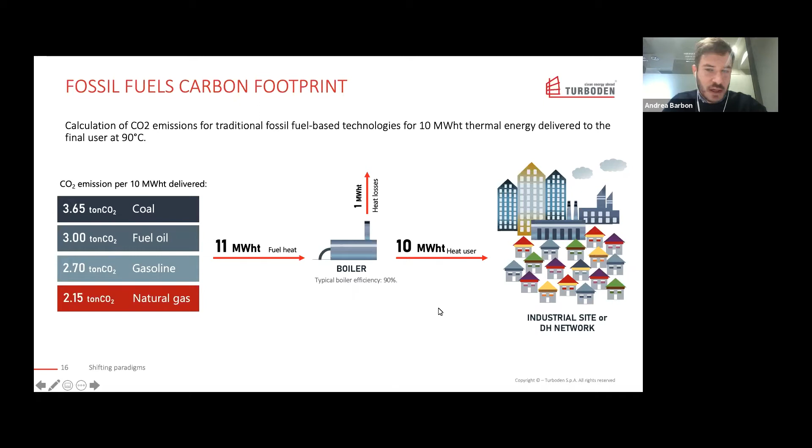Going with the heat pumps, it depends a lot on the COP, so the coefficient of performance that it is possible to achieve. The COP is defined as the ratio of the thermal power output of the heat pump, so that 10 megawatt-hour thermal, with the electricity consumption. Here I put 1 to 2 megawatt-hour, saying that this specific example is based on industrial heat recovery. The COP formula can also be presented in a different way: in order to have good COPs, it is important to limit the delta T between the heat user and the heat source. The heat source could be from industry or from the environment.

And here I presented a couple of alternatives. In case the heat source is from industry, the typical temperature of that heat source is between 50 and 70 degrees. For sure, it depends a lot on the specific case, but these are the typical temperature levels. And the typical heat carrier is wastewater or some exhaust gas within the industry. In case of an environment heat source, it could be groundwater, seawater, or river water in the range of 10 to 50 degrees C, depending on the heat source specifically.

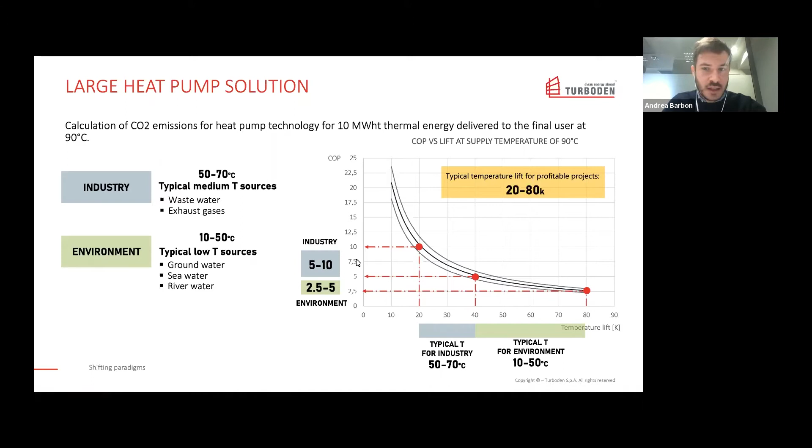And here on the right side, I show the potential and typical COP achievable in case of an industrial heat source or a heat source from the environment. So for the industrial heat source with a temperature of 50 to 70 degrees, the typical COP achievable is in the range between 5 and 10, while in case the heat source is from the environment, the typical COP is much lower, 2.5 to 5, meaning that to produce the same amount of energy output, it is needed to consume more electricity. So in principle, where the heat source is at a higher temperature level, it is much more convenient to have a heat pump in place.

So here the comparison is in terms of CO2. So I'm just saying that electricity, with a COP in the range of 5 to 10, the consumption is 1 to 2 megawatt-hours electric. That electricity could be bought from the grid or from renewables. In case it is bought from the grid, the CO2 emission to produce that electricity is strongly related to the specific country's energy mix.

I will say that we took some data from the EEA about that, showing the specific CO2 emission per megawatt-hour country by country in the European countries. And here I took the average value of 295 kilograms of CO2 per megawatt-hour. This is the European average value, but as you can see here in the right-side chart, it is strongly variable depending on the specific country. Where it is very low, it means that there are a lot of renewables in place, lowering that emission.

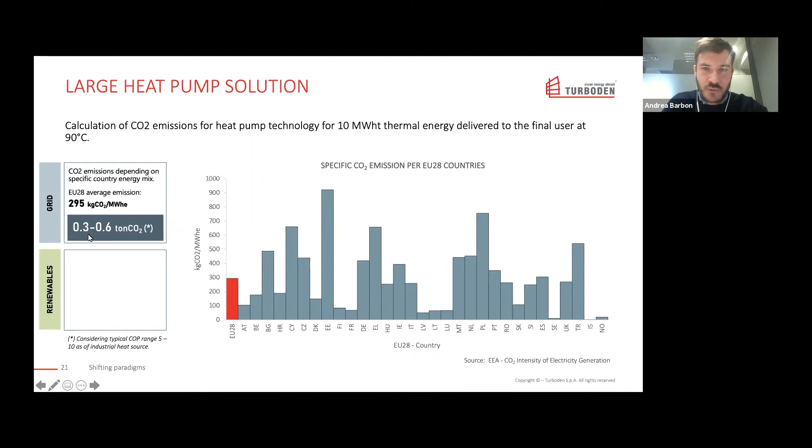So taking the average value, the carbon footprint for that 10 megawatt-hour thermal power will be in the range of 0.3 to 0.6 tons of CO2. In case the electricity is produced with renewables, hydro, wind, solar, and others, then the specific carbon footprint will be zero. So the CO2 emission will be net zero.

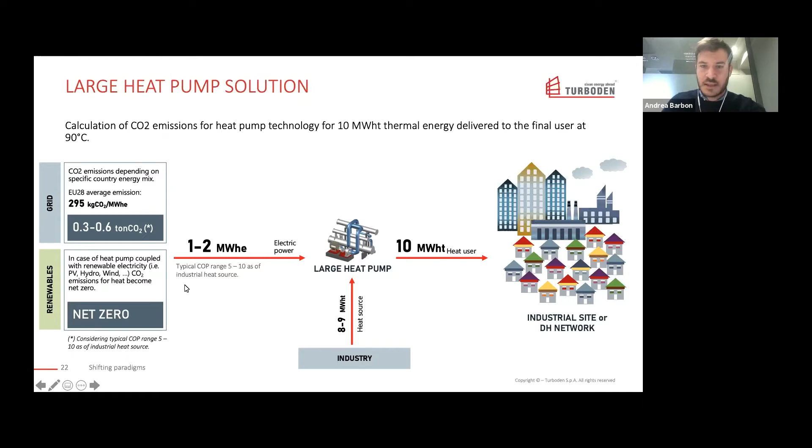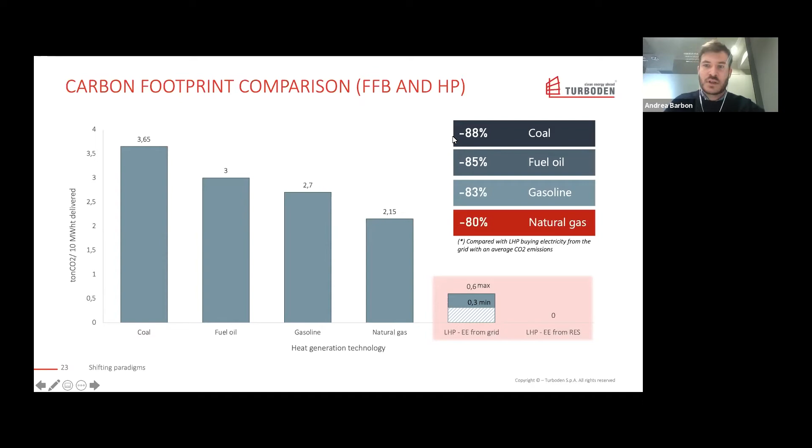So here I complete the comparison showing the huge gap between heat pumps and fossil fuel-based technologies to produce the same amount of heat, saying that for sure it is 100% reduced in case the electricity of that electrically driven heat pump is acquired from renewable energy sources, while in case that electricity is bought from the grid, the reduction in terms of carbon footprint will be in a range from minus 80% up to minus 88% when comparing with coal.

Okay, here I'll start the comparison in terms of operative costs. So it is an economic consideration. When talking about the fossil fuel-based boiler, the main costs for that energy are the fuel price, which is different country by country, and the carbon tax. That is something that was introduced and will be much larger in the following years as per the global trends. While with the heat pumps, the only cost will be the power price, so the electricity that you are acquiring from the grid or from renewables.

Here is another chart showing the spark ratio between electricity and gas cost; these are also data from Eurostat for a specific range of consumption of electricity and heat. This is typical for the industrial sector, showing on the upper side the electricity cost country by country, and on the lower side the heat cost country by country. As an average in Europe, the electricity cost is in the range of 90 euro per megawatt-hour, while the heat cost is in the range of 25 euro per megawatt-hour.

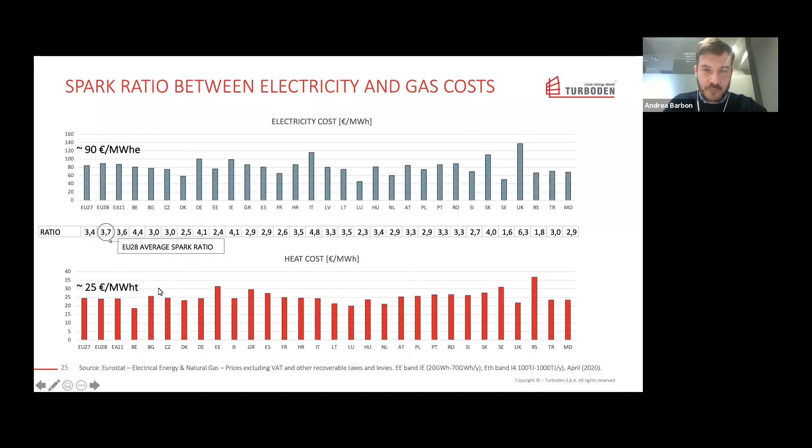So saying that, I will then switch to the calculation. It means that with fossil fuel-based technologies, the operative cost could be 275 euro per hour to produce that 10 megawatt-hour of thermal power, while for the heat pump, depending on the COP achievable, for sure the higher it is, the lower the electricity consumption, so the lower the cost to run that heat pump, but it is in the range between 90 and 180 euro per hour.

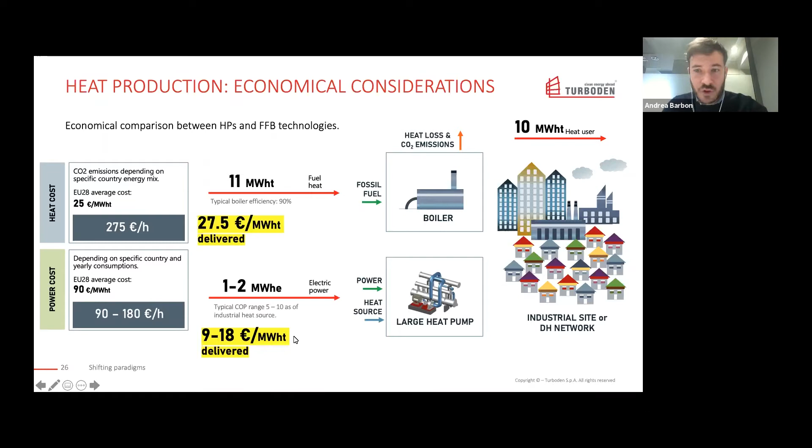It leads to a difference in terms of specific cost that I highlight here, 27.5 euro per megawatt-hour in case of fossil fuel-based, and 9 to 18 in case of heat pump. So there is a huge gap in terms of operative cost for the example I show here.

So here are some final considerations, saying that the synergy between industry and the district heating network, so the final user, and the industry that typically has high temperature heat sources, leads to high COP, so reducing the electricity consumption to run the heat pump. The second is that the heat pump technology leads to lower operational cost when the ratio between COP and the alternative boiler efficiency is higher than the spark ratio, defined as the ratio between electricity price and heat price.

Very important, since that spark ratio, as I showed, due to the global trends, is going to be lower. So it increases the number of cases where heat pump technology is particularly suitable and better, not only in terms of carbon reduction but operational cost, compared with the traditional technologies to produce heat. The third point, also important, is that typically heat pumps have higher capex compared with common technologies, but it has little influence on the levelized cost during the 20 years of expected lifetime of the heat pumps.

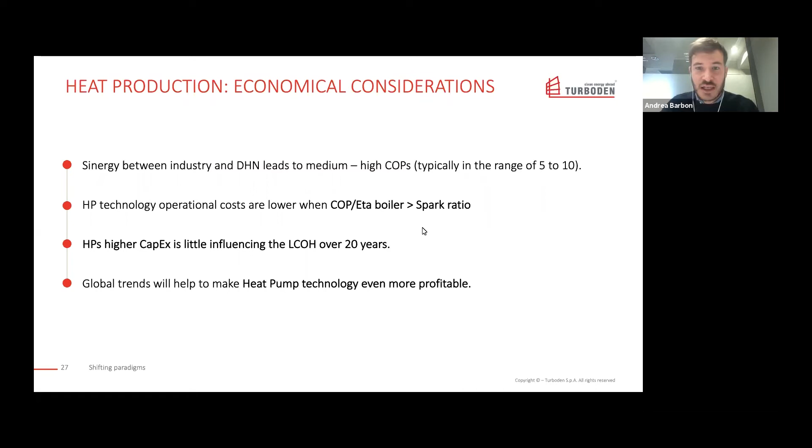And I will have here my contacts, so I will be happy to be contacted by you, and then to deeper analyze specific cases.

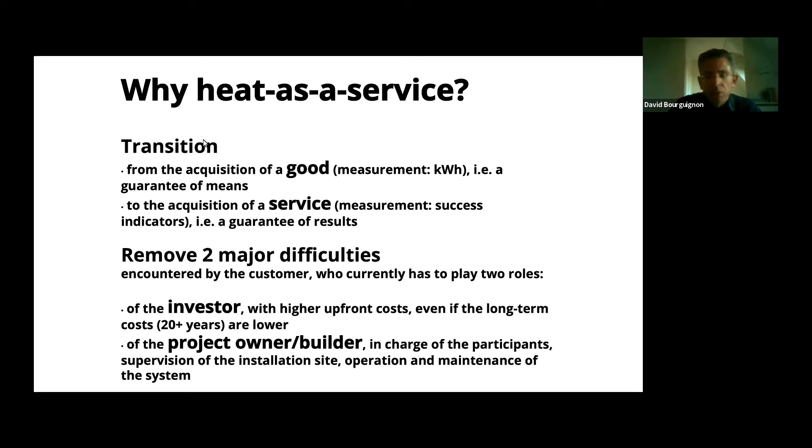So energy services want to change that. And so in Sun People, we have been considering that from a more, let's say, information technology point of view. We think that part of the issue is also that there is no unifying understanding of what the energy service is and what the conditions are for the success of this. So we have been using several software tools to build what we call a site data pipeline, which will be released, as I said, end of July. It's more a methodology, if you want, to help us design the right solution for the customer.

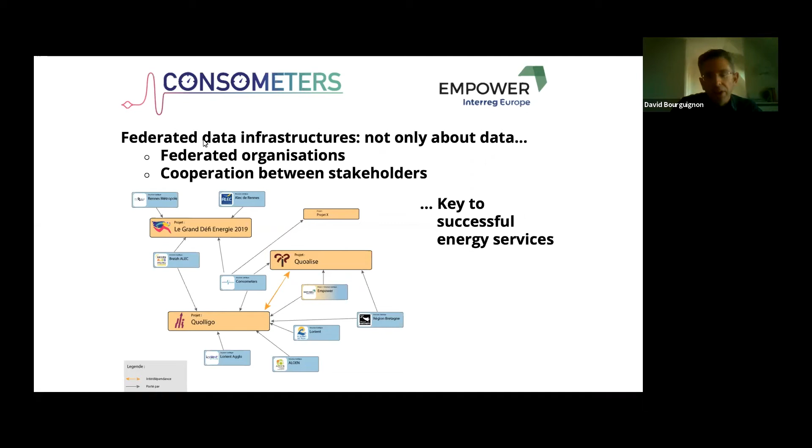And it's not only about computers and data, it's really about people. It's really about making organizations work together, about stakeholders cooperating, because an energy service is very rarely the product of a single company. It's in general a series of stakeholders that really have to cooperate, and that's where the complexity lies. And we think by using such technologies or data exchange, we could simplify that.

And so to conclude, the goal of the local authorities - so I mentioned Plymouth, but there is also Lorient. This is the place where Aloen is. And we have a very high challenge of decarbonization of individual housing. We have lots of houses with oil boilers. We have to remove them. We have to replace them with solar and heat pump combinations. And this is within the next 10 years.

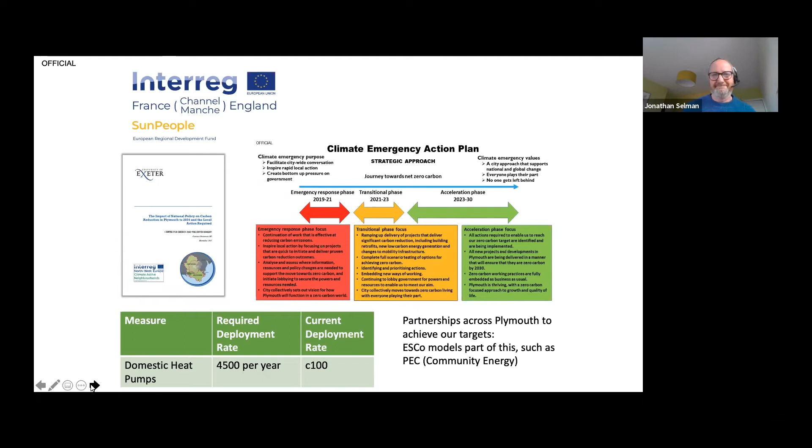Really building upon that topic that David and John have mentioned around collaboration, and particularly the role of community energy groups in this delivery of decarbonising heat. And potentially that playing that role between the likes of local authorities and also industry as well, both in terms of the supply chain industries and also those who need to decarbonise their heating.

Community energy groups are often non-profits, and certainly in Plymouth Energy Community's case, we're a non-profit. We're there to benefit the community, and by that, our overall aims are to reduce carbon emissions, heating of which is obviously a massive factor. We want to reduce energy bills for local people, and we want to tackle climate change.

So there's some big aims there, and people often look at community energy and think, oh, it's kind of small, volunteer-led. But actually, there are a lot of community energy groups in the UK. There's around 300 or so in England alone, and they have a very good track record of delivery.

If you take solar, for example, and electricity, they've delivered around 200 megawatts of solar across the UK. And in Plymouth alone, Plymouth Energy Community owns about 20% of the city's renewable energy generation, which is quite a lot. And if you look at that track record in delivering electricity projects, and you compare that to heat, well, it's much less.

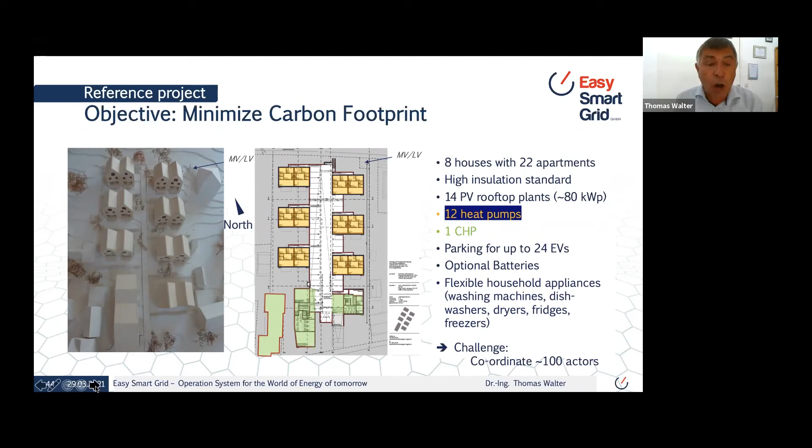Now, all this must be coordinated, and that's the challenge. How do you coordinate these roughly 100 flexible actors to cooperate efficiently? And cooperating efficiently means that you actually consume energy when it is available.

So they actually operate until they have filled a buffer, and then they wait until the buffer is empty, and then they start again. So that's very traditional.

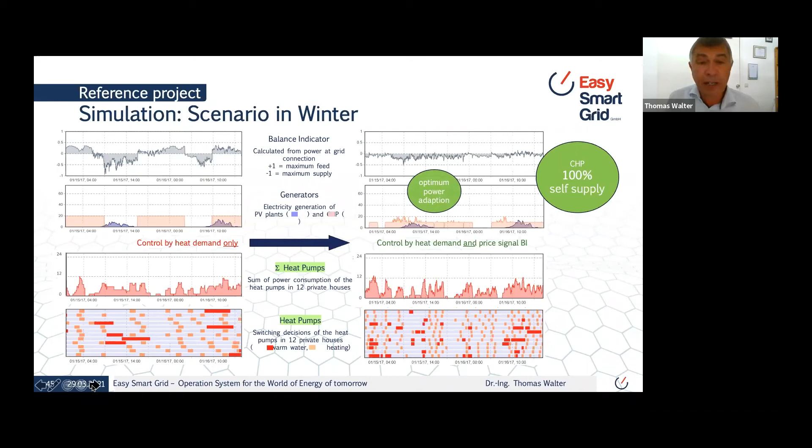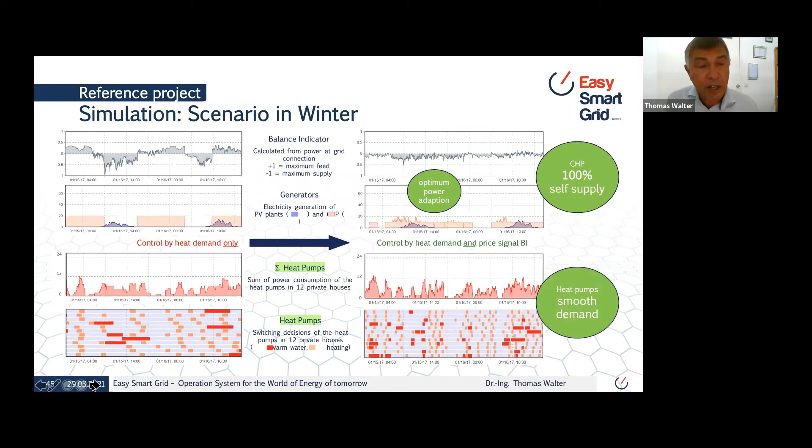So the CHP only runs for self-supply. It adapts to the power need with the grid. And the heat pumps also smoothen the demand. You see a very irregular pattern of the heat pumps' operation, but if you look at what happens at the grid, it makes it very smooth.

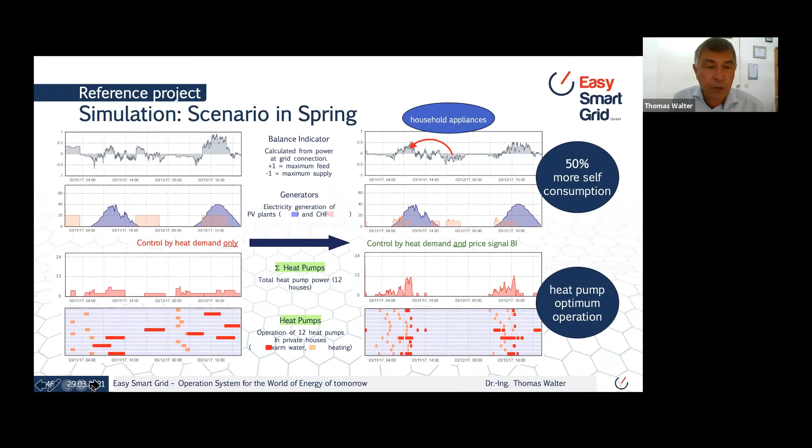There's another one in summer. I'm not going into much detail to not waste time. You can look it up in the proceedings.

Batteries would increase it further, but it would also add cost to that. Now, how do you convert an ordinary heat pump to a virtual battery?

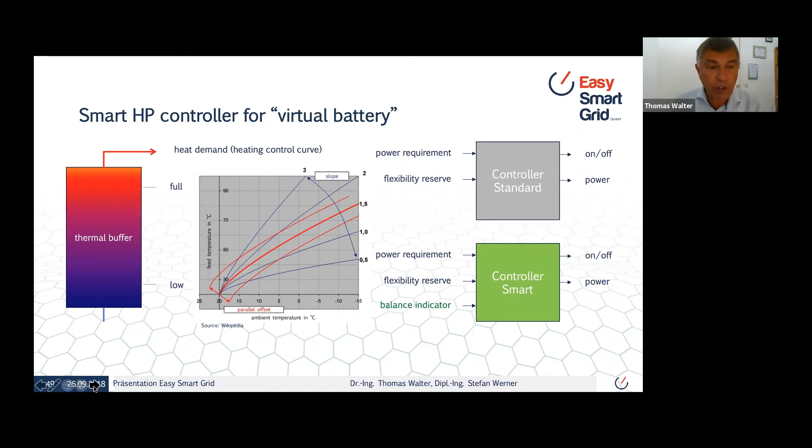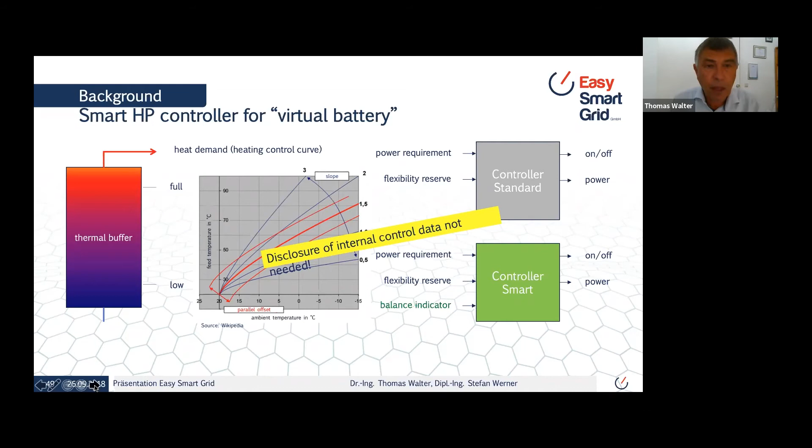Now, the difference from any other of the proposed technologies is that you don't need data to do this. You don't need to disclose any private data. So you solve some of the problems that complex systems have. Now, this is a heat pump - the manufacturer is from Austria.

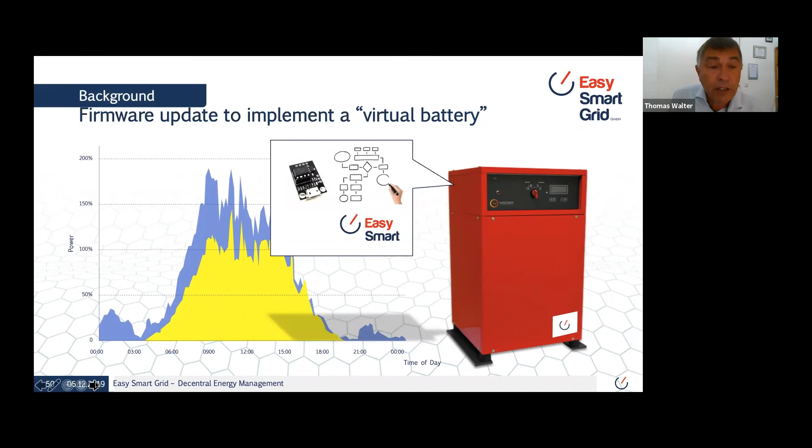And it just shows how you change the behavior. You just add an algorithm. And whereas before you had a different consumption pattern, you adapted the availability. So the technology behind this is a new one, which we have developed in the last years. It's a local energy market. This is also part of the considerations of the European Commission to have dynamic tariffs.

So when you have an imbalance in your community, when your price is not correct, then obviously the result is that you produce too much, or you produce too little, or you consume too much or too little. If you have an imbalance, you see it at the export of the energy from the community. And you can determine from this single information how to correct your local price, and that's what we are doing.

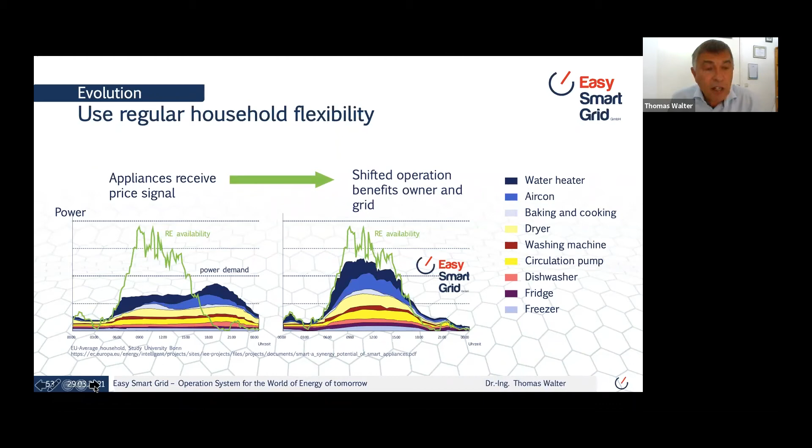So what you have to do, of course, is that your appliances have to receive a price signal. They have to be equipped with an algorithm, and that's what we are implementing with one of the project partners in our demo project. So the two options you have, either you have a battery that shifts the energy from the time it's produced to the time when it's consumed, or you have an appliance that shifts its operation in the other direction, and there is a huge price differential between the two. So a typical washing process would be a 1 kilowatt-hour battery.

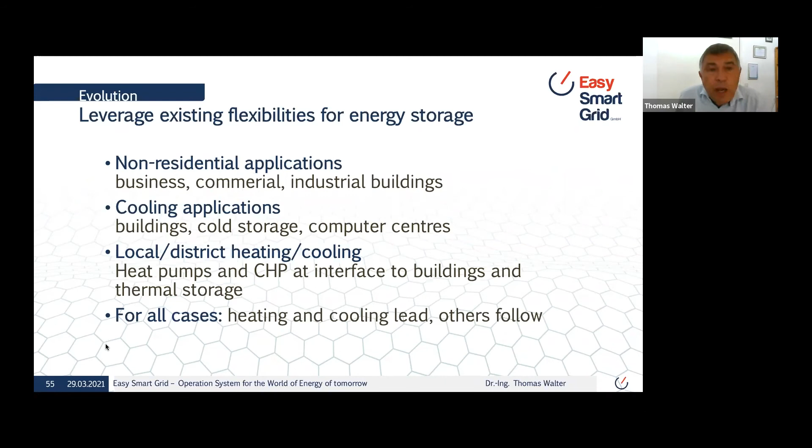So obviously, there can be many more applications to this, which we are currently exploring, like non-residential applications in businesses or industrial environments. We only used it for heating because in Germany, so far, we don't need a lot of cooling of residential buildings in summer. It's growing. But obviously, the same principle can be applied for heat pumps or compressors used in cooling applications. Local district heating, of course, is the same. And we think in all cases, heating and cooling will be a pilot application because of its huge value and existing infrastructure, and the others will follow. That's why I'm very happy that we have a presentation here at EHPA.

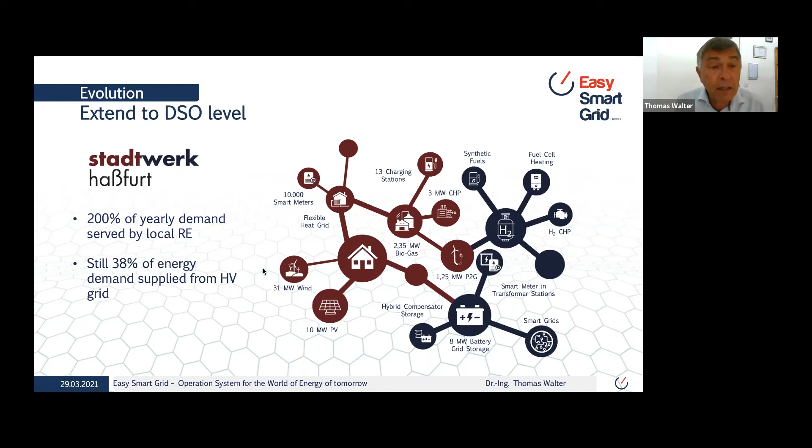One last example on a larger installation. This is a small community of some 15,000 inhabitants, which already today is energy positive. So they already produce double as much renewable energy than they consume. Still, because it's not time adapted, they have to import some part of their energy from the high voltage grid and have to pay grid fees for that. So what they want to do is shift their operation of the production and consumption as much as they can and avoid this cost, which would add up to some 4 cents per kilowatt hour grid fees for all the inhabitants of this community.

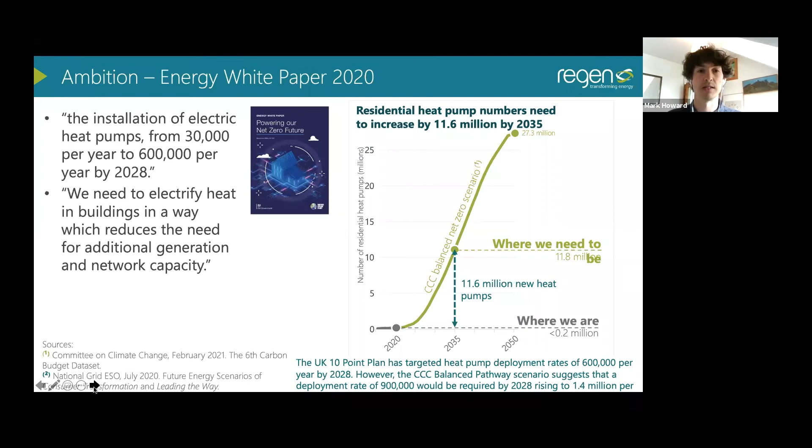Alongside this ambition to install more heat pumps, the white paper identified that we need to electrify heat in buildings in a way that reduces additional stress on the grid and additional generation capacity needed. So we need to do that in the most efficient way possible.

How we heat our homes at the moment in the UK is predominantly with fossil gas, and there's a small population of heat pumps. And in all future scenarios that we look at, we get involved a lot in working alongside the National Grid Future Energy Scenarios, producing more regionalised pictures. But in the National Grid Future Energy Scenarios looking out to 2050, all of the net zero scenarios involve a lot of heat pumps. So you can see here, even in a high hydrogen scenario out to 2050, we'd be looking at increasing the number of heat pumps in the UK from just under 200,000 to over 8 million.

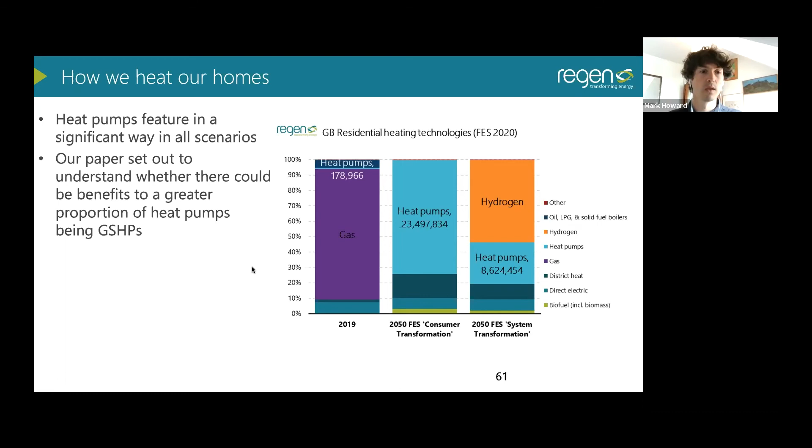So in any of those scenarios, we're going to have a large increase in the number of heat pumps we have in the UK. And our paper was seeking to understand whether there was a role for a greater proportion of ground source heat pumps in this mix in the future. So historically, we have had a relatively low market penetration of ground source heat pumps in the UK, about 10%, which is lower than the European average. And this low percentage is often reflected in future scenario modelling.

And it's something I'm aware of from my background in the installation side of the industry, design and installation for domestic low carbon heating, is that many projects start as a ground source heat pump project, and unfortunately often face a number of barriers on the way and get changed before actual delivery. So we were seeking to understand whether there's a new business model or a new approach that could help unlock the market for ground source heat pumps.

As we know, ground source heat pumps typically offer a lower peak demand on the network and a lower annual demand. So moving forward, as we electrify more heat and more transport, ground source heat pumps offer the potential to reduce that winter peak or that daily peak and reduce annual need for generation.

The traditional model of a householder installing their own ground array rules out a ground source heat pump for about half of the homes in the UK. So about half of the homes are flats or terraced houses with little or no outdoor space that they privately own in which they could install a ground array. So the potential to share a ground array, installed in a common piece of land and then connected to multiple buildings, would unlock the potential to decarbonise using ground source heat pumps in about half of the homes in England. So there's some interesting potential there. And that's something we were looking to understand with this model.

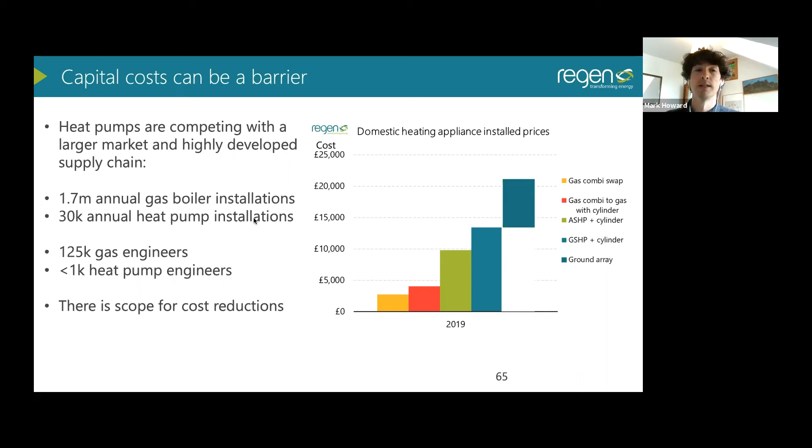And we made an attempt for our paper to model some indications of where this market might go. And we found that with market scale, cost reductions in manufacturing and installation, as well as cost of sale, could certainly bring heat pump prices in line, so that an air source and a ground source heat pump could become in line with each other as the ground source heat pump market grows. But we did find that even with that, it's unlikely that the capex could come down to the same as a high carbon heating appliance, and so there's probably some policy and regulation movement that needs to go there to help further incentivize uptake of heat pumps.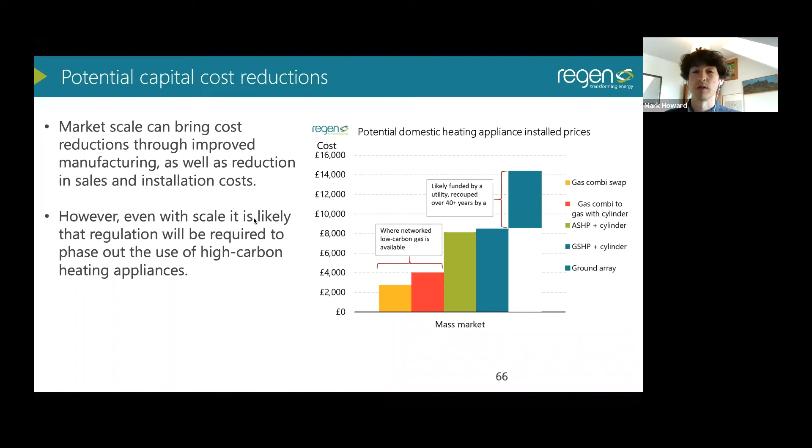So one thing that I think some of my former speakers have mentioned, and is increasingly being discussed at the moment, is this issue of the spark gap between gas and electricity. And we've looked at this a little bit in the UK and how those two costs of gas and electricity break down at the moment. Largely the cost of electricity in the UK is pushed up at the moment by bearing a huge amount of the environmental levies that we put on.

That made sense a decade ago when electricity in the UK was equivalent to about half a kilo of carbon for every kilowatt hour used. Now I think the most recent figure is that's come down to about 200 grams, 220 grams per kilowatt hour, which is now in line with gas. But despite gas and electricity currently having a similar carbon impact, 20% of a domestic electricity bill is environmental levies, and only 1.6% of a gas bill is environmental levies.

It's very disproportionate, and this disincentivizes people to take up heat pumps and other forms of electric heating. So one thing we looked at was whether a shift of these levies away from being just sat on electricity to a carbon levy across all heating fuels could have an impact. We found that whilst it wouldn't dramatically change the situation, it would push things in the right direction and be a starting point for a technology agnostic approach to decarbonising our heat.

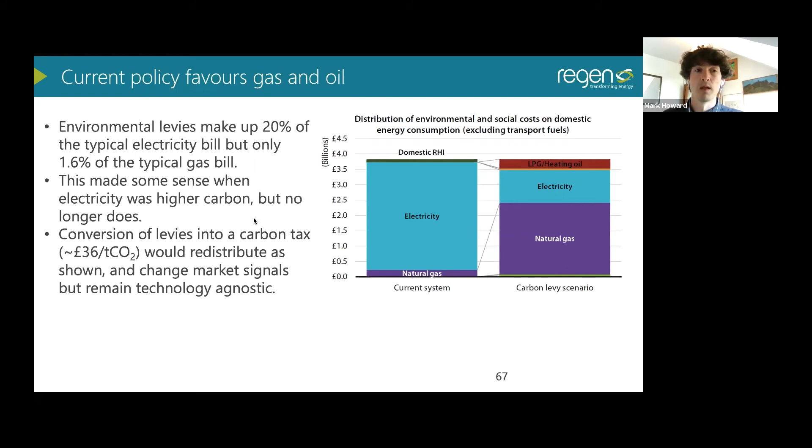So all of these pieces, in many ways, brought up more questions than answers in our paper, which was something we expected. We were hoping to bring this discussion to the fore and to the attention of policymakers, to get more work looking at this potential solution to help meet our goals and ambitions of increasing heat pump installations and doing it in the most efficient way possible.

The indications are that there'll be quite an appealing consumer offer with a shared ground array ground source heat pump. Our modelling suggests that if you had a ground array connection like a standing charge for gas, it could bring an air source heat pump and ground source heat pump cost down to be about the same capital cost and about the same lifetime cost. So for a consumer, that would mean they could choose the most appropriate type of heat pump to decarbonise their building. That unlocks a lot of potential there.

We've seen this business model working with the support of the domestic renewable heat incentive, or the non-domestic renewable heat incentive, in the UK, which is now closed, so there's a bit of an absence of support there at the moment. There's potential that new standards for new build homes could drive an increase in this sector, and there's obviously a strong opportunity in urban areas to complement or act as an alternative to district heat networks. But support is needed for the development of this sector and for the business models to work.